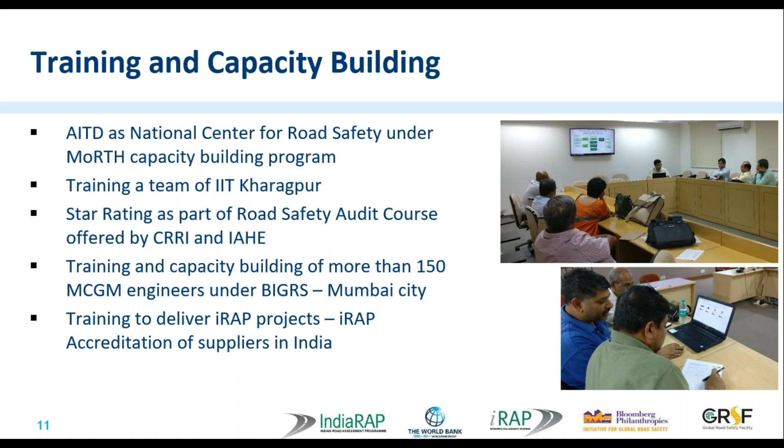As a part of BIGRS for Mumbai, over 150 municipal corporation engineers and planners of Greater Mumbai have been trained to use star rating as a systematic tool for road safety assessment. Accreditation training has been delivered to 2 firms in India to build local capacity among professionals to deliver iRAP projects.

An IndiaRAP team member is a part of the IRC's Technical Committee on Road Safety, and IRC is a body under the Ministry of Road Transport and Highways. We regularly interact with the Ministry of Road Transport and Highways, including the National Highways Authority of India, and recently had a meeting with the Supreme Court Committee on Road Safety, which is the apex body set up on road safety in India.

The IndiaRAP team has delivered numerous projects in India, covering about 18,000 kilometers of road network, as we have seen in session 1 of this webinar. Building local capacity to conduct safety assessments and providing training and implementation support to road authorities is the focus of IndiaRAP.

Training and capacity building in the region to make systematic safety assessment more sustainable: the IndiaRAP team has provided such support in Bangladesh and is willing to train more professionals in neighboring countries, including Bangladesh, Nepal, Sri Lanka, which will help to build capacity among road authorities, and safety assessments can be conducted in a cost-effective manner.

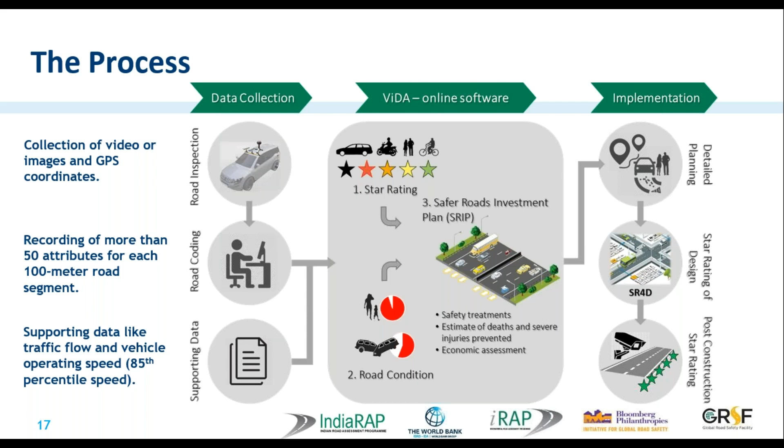Now, before we go into more details in the process of data collection, how data is collected, I'd like to explain how the star rating model works. So the model is based on the crash system, how the crashes happen. So here in this image, you can see there are 4 road user groups present. Vehicle occupant shown by symbol of car here. We have motorcyclist, we have bicyclist, we have pedestrians here, here, and here.

Now there are different types of crashes possible in a situation like this. For example, a vehicle or motorcycle loses control and goes off the road, this side or this side. That's called a runoff crash. In fact, vehicle when goes off the road, it may hit the pedestrian as well. Now, vehicle or motorcycle carries out an overtaking maneuver, and during that, it may be involved in a head-on collision with another vehicle coming from opposite direction.

Vehicle or motorcycle taking turn at the intersection may be involved in a collision that we call intersection collision. A pedestrian walking in the roadway, maybe here or here, hit by a vehicle, so that we call when pedestrian was walking along the road hit by a vehicle. Or pedestrian while trying to cross the road, for example this road here on the intersection or this main road, may be hit by vehicle, so that we call pedestrian crossing collision.

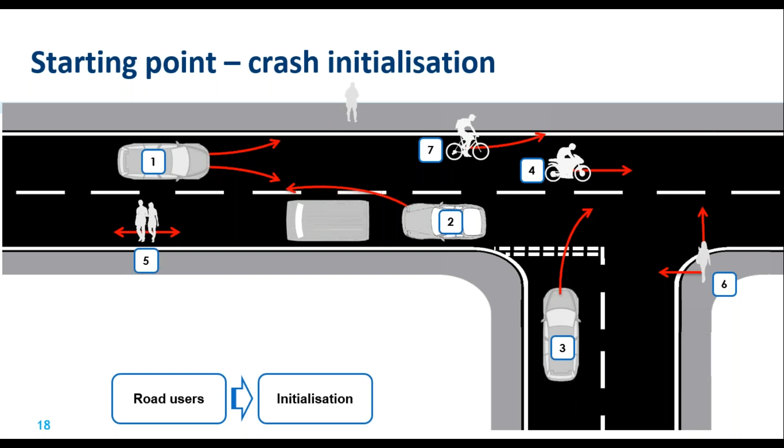Now a bit more deeper, if we see how the runoff crash happens. So runoff crash is the one when the vehicle or the driver loses control and the vehicle goes off the road this side or this side. So vehicle may run off on either left hand side or right hand side. Now here in the iRAP terminology, we call it passenger side or driver side.

So in India, we drive on the left side. So driver sits on the right hand side of the car. So this is called driver side. That means right hand side is called driver side and left hand side is called passenger side, as passenger sits here. So the vehicle may run off on the passenger side or driver side.

Now what happens when the vehicle goes away from the road? The driver may understand that he is losing control and he may be able to recover and come back. So in that case, the crash initializes but doesn't happen. On the other hand, if it runs off on the driver side, and if there are enough vehicles in the opposite direction, that crash may result in a head-on collision. If low traffic volume, the chances of head-on collision are less, but it may run off on this side.

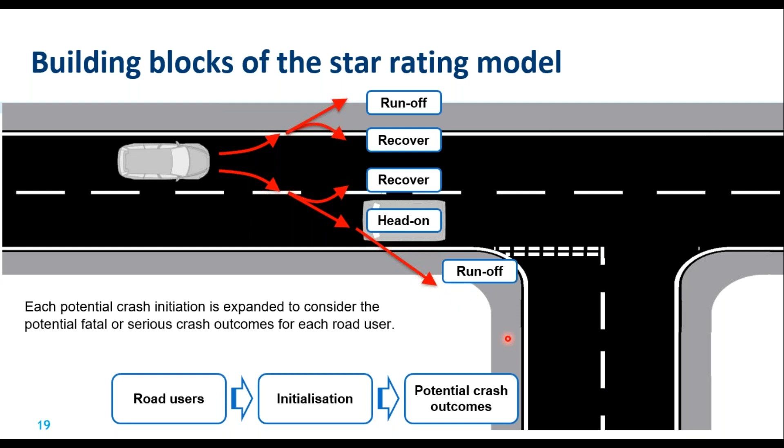So these are the crash types which I mentioned. For vehicle occupants, we have the runoff collision on the driver and passenger side, and same way for motorcyclist. There are 2 types of head-on collision. So head-on collision happens because the driver loses control. Now that reason may be anything, maybe talking on the phone or maybe some infrastructure deficiency. Or the driver is trying to overtake. That is, he is completely aware of the situation. He is trying to overtake and is involved in a head-on collision.

Any crash happening in the intersection area, that's the intersection crash. A crash also may happen with vehicles entering the road from adjoining properties, such as fuel stations or residential or other commercial buildings. For motorcyclists, we also have the along type of crash, where the motorcyclist is hit by another vehicle from the rear or from the side.

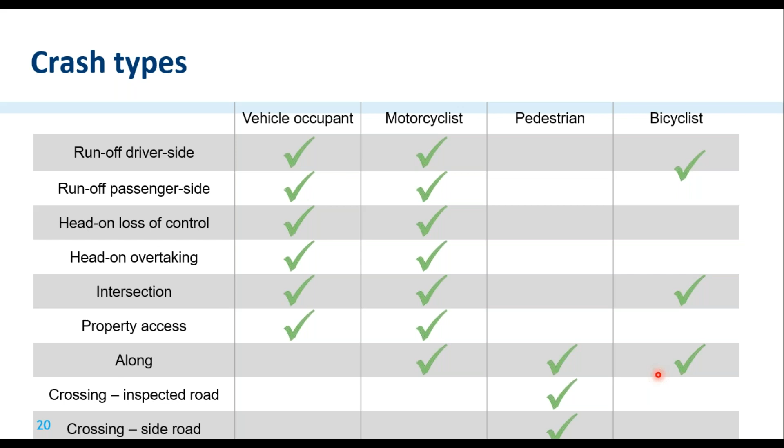For pedestrians, it is either while walking along the road, so the pedestrian may be walking on the footpath or on the road itself and hit by a vehicle, or crossing the main road or crossing the side road in case there is an intersection. For bicyclists, similar to the motorcycle, we have runoff crash, intersection, or the along type of crash. So these are the major types which happen in such a situation, and the star rating model is based on this.

Now the iRAP model calculates the star rating score, called SRS, you can see here, and it is calculated based on the road infrastructure data, traffic volume and speed. So this is the basic structure of how it is calculated. You'll see that there are 4 components here. The first one is the likelihood of a crash. If some road attributes are poor, the likelihood or probability of a particular crash type occurring is very high. If these attributes are good, then the likelihood is low.

Then comes severity. Even if the likelihood is very low, the crash may happen. So if the crash happens, what is going to be the level of injury or the outcome? Again, it depends upon some types of road infrastructure attributes. Then comes the external flow influence. For example, high traffic volume, higher chances of crashes occurring. And this one, operating speed, is very obvious. Higher operating speed or traffic speed, higher is the risk of crash. So these are the main 4 attributes of how the star rating score is calculated.

So the star rating score is a mathematical value. If this score is high, the risk is high. If this score is less, risk is less. So road segments with a high star rating score get a poor star rating, like 1 or 2 star, because the risk of crash is more. Road segments which get a low star rating score get a better star rating, such as 3, 4 or 5 star, because the risk of crash is low.

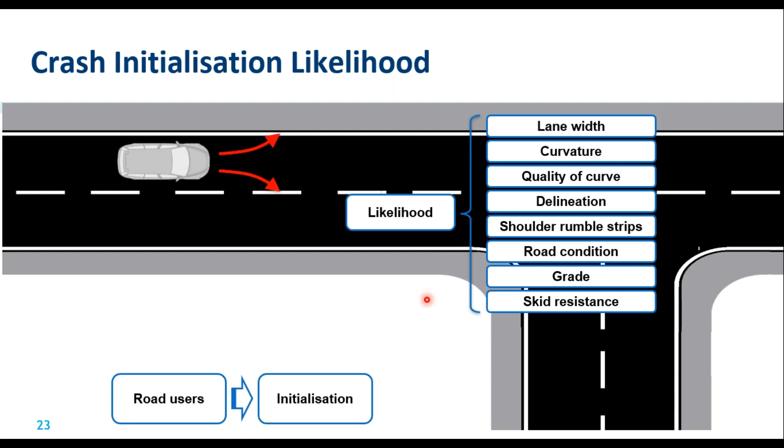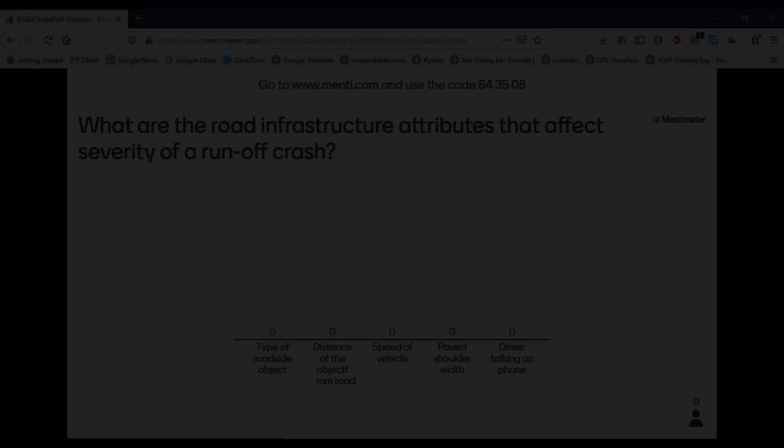Okay, now next question: what are the road attributes that affect severity of the run-off crash? If the run-off crash happens, what will be the level of outcome, the severity: minor injury, major injury, or death, that is a fatal crash? So again, go back to your menti.com and you will see the next question: what are the road infrastructure attributes that affect severity of a run-off crash? Okay, so we have got responses.

So think about level of injury. If the vehicle goes off, what will be the outcome, whether it's going to be a minor injury or major injury. Yeah, we are seeing the maximum responses for speed of vehicle. In a way, that is correct. But if you see the star rating score equation, speed of vehicle is a different factor. It's the fourth one in this sequence.

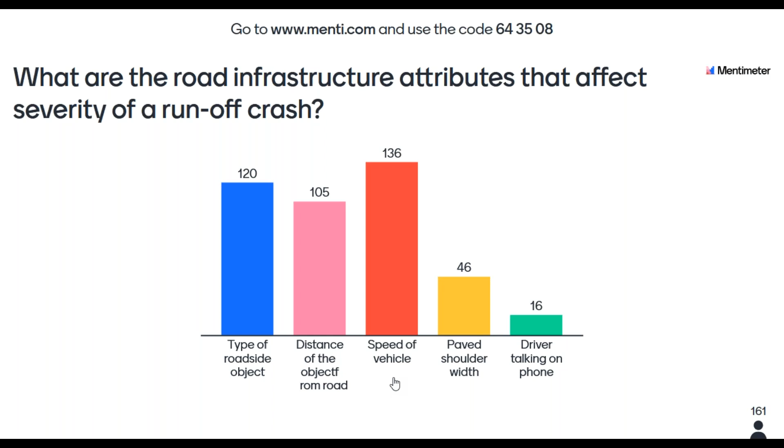So now we are talking about severity, and we are only talking about the infrastructure attributes. Speed is very important; speed comes everywhere, in the likelihood or severity of any crash type. Speed is the most crucial part. So it's great, we have got 160 responses. Now I'll take you back to the presentation. So see, these are the attributes which affect severity.

So roadside object: what type of object is present? For example, if there is a tree or pole, there will be some injury. If it's a hill road and there is a cliff, the vehicle is going to go into the cliff, and that may be a fatal crash. So the level of injury or severity depends upon what type of object is present.

The next important thing is distance to object. How far is the object? For example, a tree here compared to a tree far away from the road edge. When the vehicle goes off, its speed reduces if the object is far away from the edge of the road, and that brings the clear zone concept into the picture. We also have paved shoulder width.

So normally on this paved shoulder, there is no object. All solid objects are beyond the paved shoulder, and it also acts as a buffer zone and gives a chance of recovery. So these are the three road infrastructure attributes which affect the severity of the crash. Speed, as I mentioned, no doubt is very important, but it's not one of the road infrastructure attributes. It is something like an external influence factor.

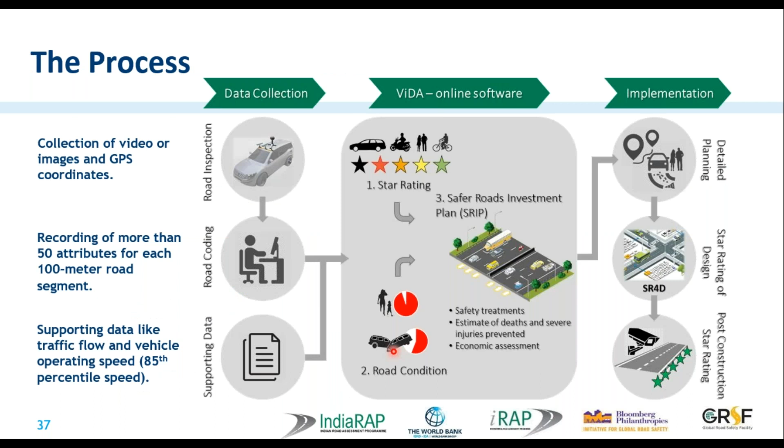Now coming back to the process, the data collection, the first stage is the road survey. The road survey is often conducted using a network survey vehicle, such as the one shown in this image. You can see it has essential equipment like cameras mounted on top and a GPS receiver mounted here. These two are the basic minimum requirement for collecting iRAP road survey data. This particular network survey vehicle has some additional laser profilers and a few more pieces of equipment which are optional for iRAP assessment. For iRAP assessment, the basic minimum requirement is to have the camera and GPS.

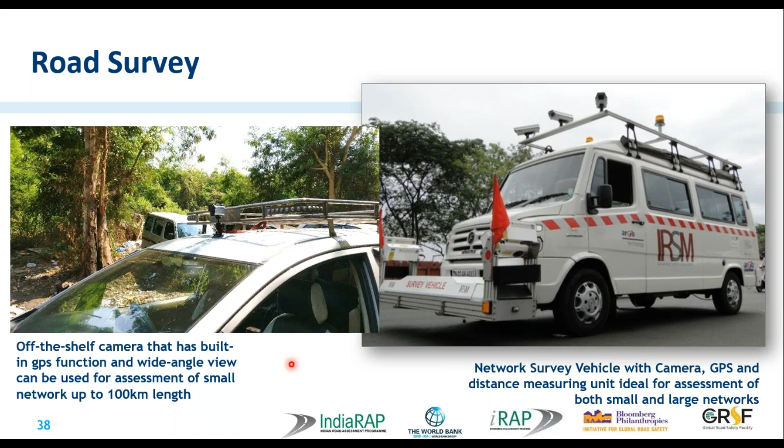It is also possible to do this kind of survey using a small camera, what we call an action camera, like this. This camera has an inbuilt GPS function, so you can record video images with GPS. And this camera is the size of a business card. But this is only good for a small road network length, maybe about 100 kilometers, because managing the data gets very difficult when you're using this type of small camera. Whereas these kinds of built-in systems also have special software for data coding, such as the one shown here.

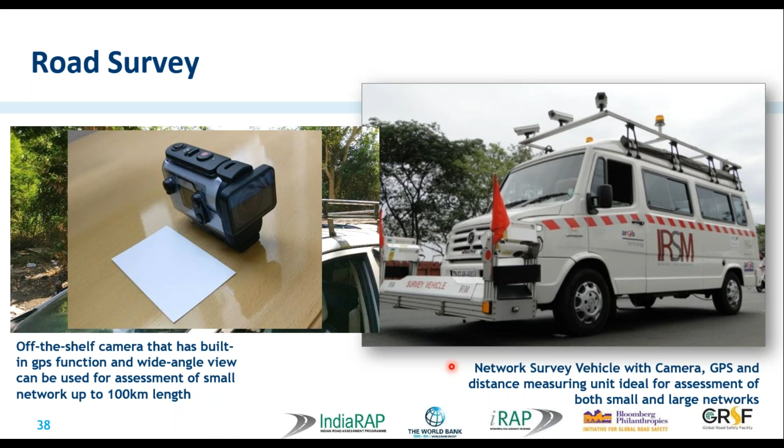So to extract the road attributes from video images: once you run the vehicle, you collect video recording of the road and GPS data. It is brought to office, and some software, like the one shown here with the network survey vehicle, provides this kind of facility. We saw 3 cameras mounted on the top of the vehicle, so you have 3 views here, and all 3 are synchronized.

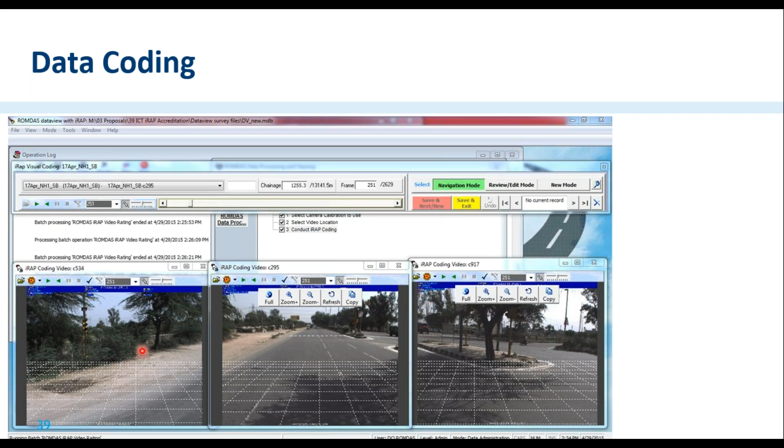We also have a measurement grid here. So if you want to measure lane width, just draw a line from here to here and it will tell you the exact width. You can measure the distance of any object from the edge of the road. Draw a line and it will tell you it is 5 meters or 10 meters away from the road. So the special software enables this kind of data coding, and it's really helpful, and essential if we are doing a large scale network assessment.

On the other screen, the person who is entering data will have a rating form like this. This is as per iRAP specification with drop-down menus. So the coder or the trained person will look at the video images of that particular 100-meter segment, enter the correct options here, save, and move to the next 100-meter segment. So that is how the data coding happens.

Now, to ensure top quality and uniformity in the data coding process, iRAP has developed specifications and manuals, and I'll show more about those in this session. So these are the road attribute data recorded, some of the key data recorded during the coding process. For example, in the image shown here, horizontal alignment, you can see it's a curvature. What are the roadside hazards present on the side of the road, like the trees visible here?

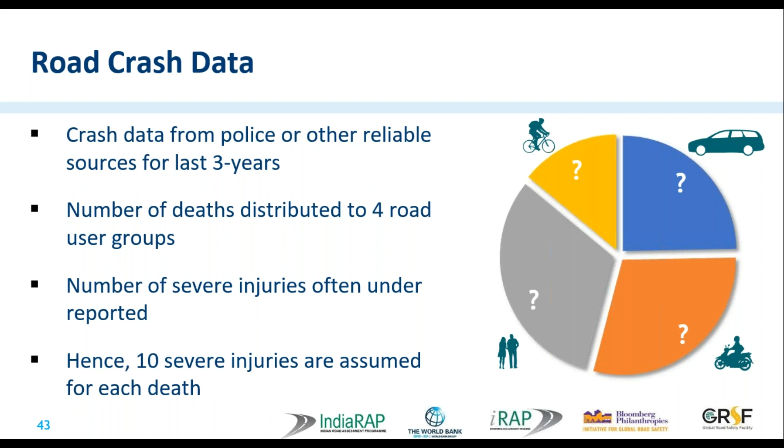Now, you may be aware that there is some economic cost associated with each death happening on the road due to road crashes. Now that's the question here again. So you'll have to open menti.com again and answer: how much is the cost of a road death in India? Let me set this up and you'll see your next question here. So how much is the economic cost of a death in India? Our options are 15 lakh rupees or 1.5 million rupees, 55 lakh rupees, 1 crore, that is 10 million rupees, or 1.2 crore, 12 million rupees. It is some approximate value. You have to guess, or answer if you know the correct answer.

Yeah, interesting to see so many people are choosing the least value, 15 lakh rupees. Okay, so now I'll get back to the slide. So see here, most of the people are choosing the least value, but then about 40 are choosing 55 lakh rupees and about 34, 1 crore rupees. Okay, so I'll get back to the slide here.

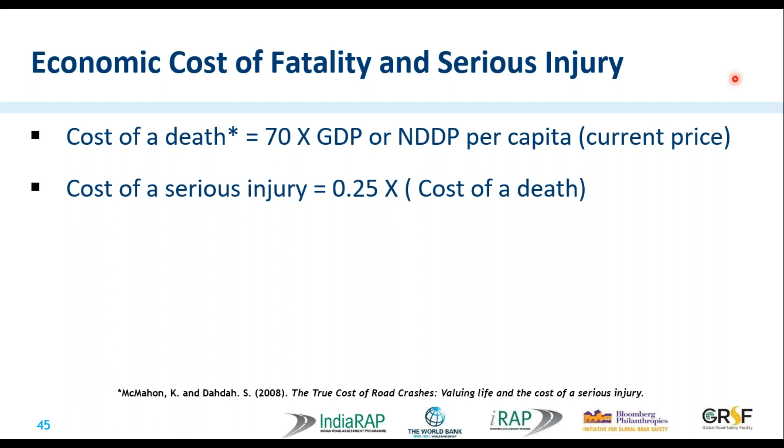The cost of serious injury is 1/4 of the cost of death. Now, if we look at the per capita income of India from the recent published data, it is about 140,000 rupees, and the cost of death goes close to 1 crore rupees or $131,000. So that's the correct answer. It's about 1 crore rupees.

Now, when we set up the project in ViDA, these are the inputs we have to give. So it's not necessary to always give this value. If you have data which is published by the government or more data, this is customizable. You can input your own value. And the cost of serious injury is about 25 lakh rupees or about $32,000 US. So that's the cost of one death and serious injury.

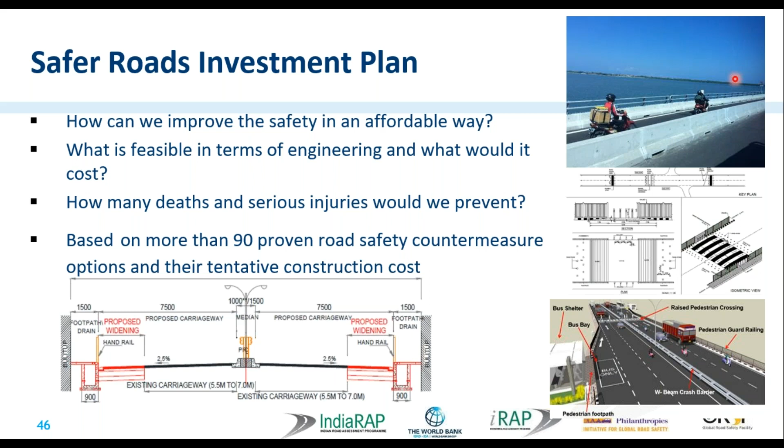Now the Safer Road Investment Plan: in session 1, Luke explained what SRIP provides. To summarize, it provides economically viable safety treatments, tentative construction cost, benefits, and how many deaths and injuries can be prevented. So preparing the SRIP involves calibration and localization of the model to ensure the investment plan matches the local conditions, and the model is calibrated with the known number of deaths that comes from supporting data that we collect.

Now the investment plan reflects local conditions, practice, and experience with a range of local data such as road crash data, vehicle operating speed, traffic volume, motorcycle percentage, pedestrian and bicycle flow, value of life and serious injury, the construction cost, and some economic analysis data. So that is how each time the model is calibrated and prepared in such a way that it suits the local condition.

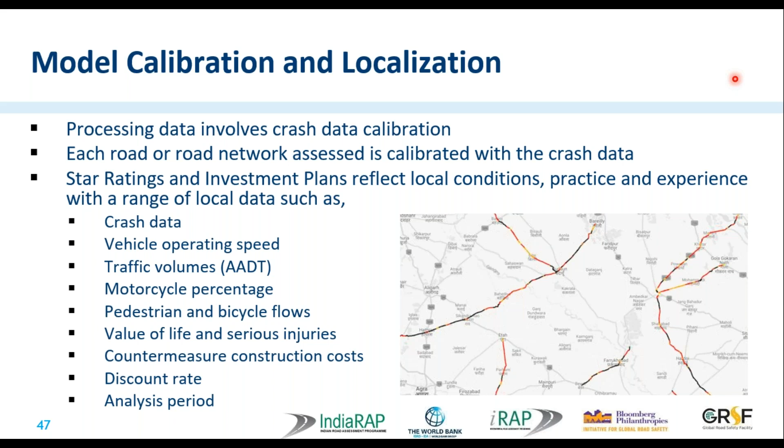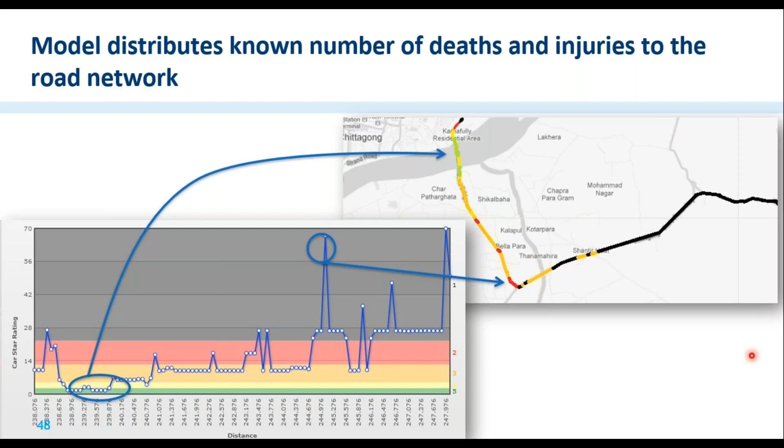Now, the next question comes: how does the model estimate reduction in FSI, that is the fatal and serious injury, or number of deaths and injuries? So that is the part of the Safer Road Investment Plan. So in this illustration, we have the existing road and we have star rating score, which gives us star rating. The model is calibrated at the time of baseline of the existing road.

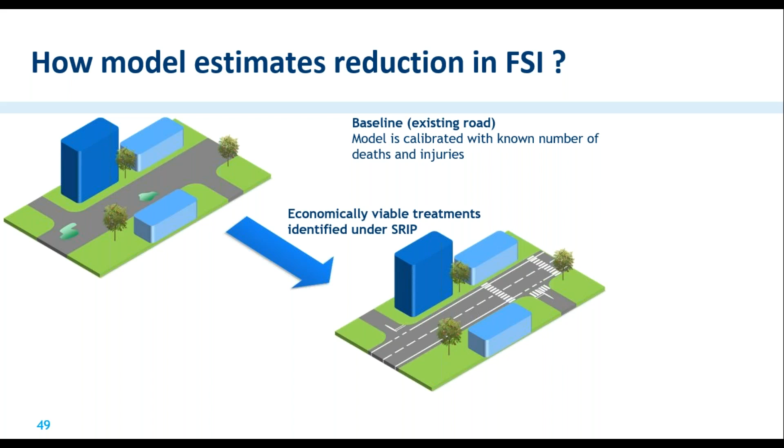Now let us say that the SRIP includes treatments like new facilities for pedestrians, delineation and improved road condition. Now the software creates a scenario for this improved road with the help of risk factors of each road attribute. For example, you can see here there is no crossing facility for pedestrians, and we are putting new crossing facilities for them. So the risk factor for no crossing facility is 6.7, and it is reduced to 4.8 for this marked pedestrian crossing, and so on for the road delineation.

So with the help of this risk factor, the model again calculates the star rating score for the improved situation, that is the scenario. And now again, using the new SRS and exposure, it estimates the number of deaths and injuries, and these are likely to be lower than the existing number of deaths and injuries because we are improving the situation or reducing the risk. And the difference between this number of deaths and this estimated number of deaths is a saving. That is how we calculate saving, how many FSIs or how many deaths and injuries can be saved.

Now, more information on these types of road safety treatments, their effectiveness, with pictures and images, is available on toolkit.irap.org. So this is the road safety toolkit developed by iRAP and the Global Transport Knowledge Partnership. So you can visit this website if you want to see more details and examples, images of different treatments.

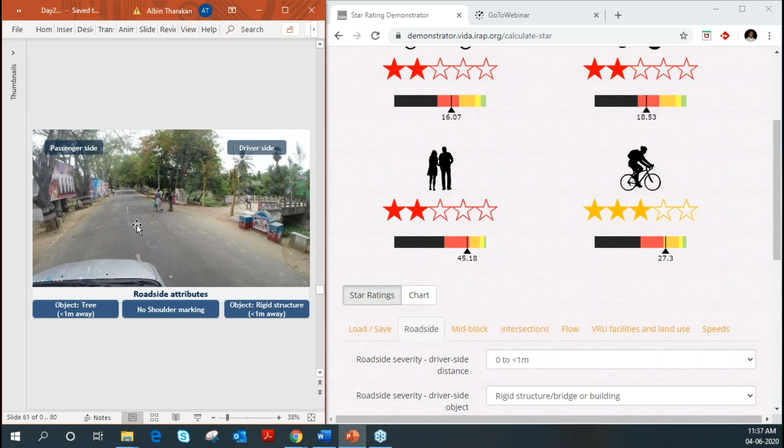While we make selections of attributes in demonstrator, there are a few attributes for which we need to mention whether it is on the left side of the road or on the right side of the road. In the coding form, you will see terms like driver side and passenger side. In India, we drive on the left and the driver sits on the right side of the vehicle. Hence, driver side means right hand side and passenger side means left hand side. So let's start with roadside attributes.

Under this, we have roadside objects and presence of shoulder. In the image, we can see on the right hand side there is some concrete structure present, which is within 1 meter from the edge of the carriageway. And similarly, on the passenger side, there are a few trees present, and again, it is within 1 meter from the edge of the carriageway. So I am filling these attributes in the demonstrator form.

Roadside severity, driver side distance, 0 to 1 meter. The other options we have are 1 to 5 meter, 5 to 10 meter, and more than 10 meter. And the object, we have the list. Several types of safety barriers are listed: upward, downward slope, rigid, semi-rigid structures, trees, signposts, etc. So in our case, it is rigid structure, bridge, or building. And on passenger side, distance the same, and object is tree.

Shoulder rumble strip not present. Paved shoulder on driver side and passenger side. As we can see in the image, there is no edge line marking present. Hence, we say paved shoulder is not present. So none on both the sides. The other options we have are narrow, medium, and wide. So now going to mid-block attributes.

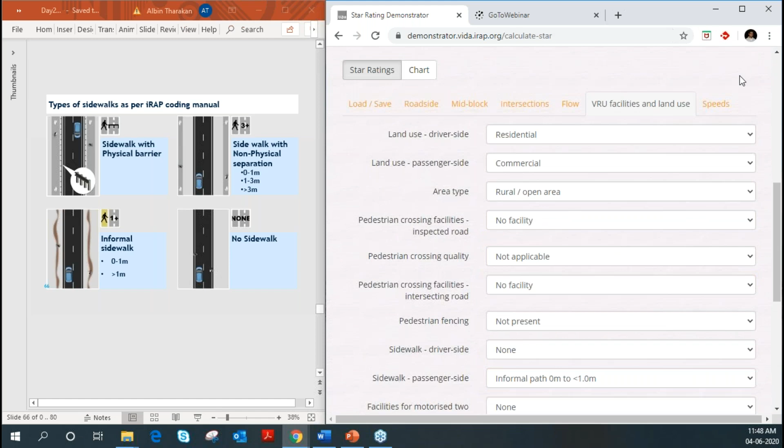And finally, we have speed attributes. Under speed, we have speed limit. This is the posted speed limit on the road, and it comes from the survey video. As we don't have any signage visible in this image, we take it from the supporting data. So that is 60 km/h. Next, we have differential speed limit. As per the iRAP coding manual, when the difference between speed limits of different vehicle types is more than 20 km/h, differential speed limit is present. Here, we have only one speed limit for all vehicle types, so differential speed limit is not present.

Then speed management or traffic calming. If there is a speed calming measure present on the road segment, such as a speed hump, it is entered here. In this case, there are no speed calming measures, so not present. And finally, operating speed or 85th percentile speed. This comes from supporting data, so it is 65 km/h.

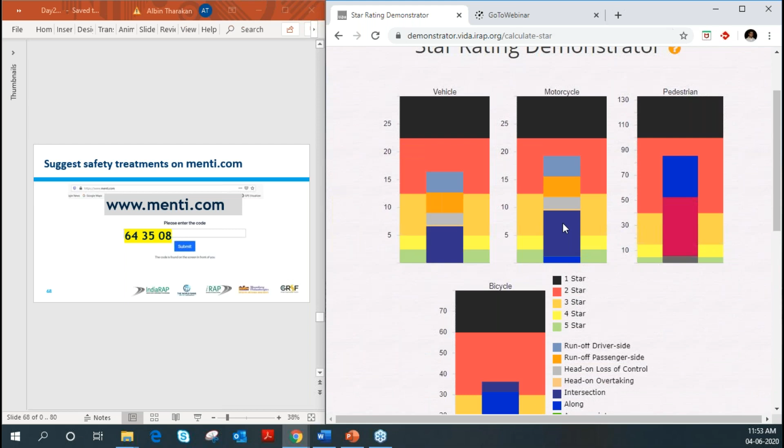So before we go to the treatments, I want to show the chart view of star rating, which is available by clicking on the chart icon, which is shown below the star rating. The chart view shows crash type wise split up of star rating score or risk score. So this enables us to know which crash type is causing a higher risk. So here in the background, the colors and the numbers shown here are star rating score bands, and the inner bar for each road user group is the star rating score for the particular user.

So here for vehicle occupants, we can see the inner bar is reaching till 15. So looking at the star rating, you can know it's around 16.41. And also the color coding inside the bar shows the split up of the star rating score in terms of different crash types.

So for example, for the pedestrian chart, we can see this blood red color, that is, in the region we can see crossing through road is posing the highest risk. So this indicates what treatment can give the best results, or else by providing a crossing facility, we can improve the star rating or reduce the risk score of pedestrians. So similarly, for vehicle occupants and motorcyclists, we can see that the blue color, that is intersection crash, is causing the highest risk.

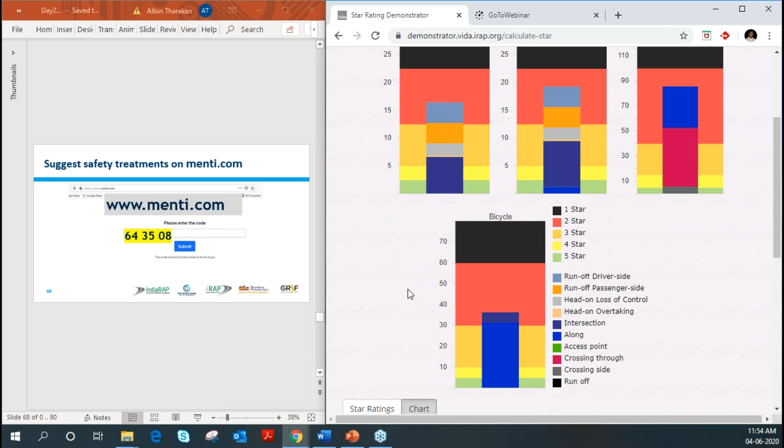So now let us try some low cost treatments and see how the star rating improves. As we saw in the chart that the pedestrian crossing risk is high, we can try some simple crossing facility. So first, let's start with zebra marking, which is simplest. So here, under vulnerable road user facilities, I'm changing the pedestrian crossing facility on inspected road to unsignalized marked crossing without a refuge. So that is a zebra marking, and as we are constructing it new, we'll assure that it meets the standards to have adequate quality.

So now we can see the star rating score for pedestrians has decreased from 85 to 72, even though the star rating is still 2-star. Now we can try some other facility, a better one. So let's say unsignalized raised marked crossing without a refuge. This is a tabletop crossing. So here the star rating score has further reduced to 61.

In addition to that, we have also seen for vehicle occupants and motorcyclists, intersection was causing the highest risk. So here we can provide some low-cost treatment to the intersections. Let's say we'll change the quality from poor to adequate by providing some signages and marking to warn about the intersection. We can see the star rating score has further reduced.